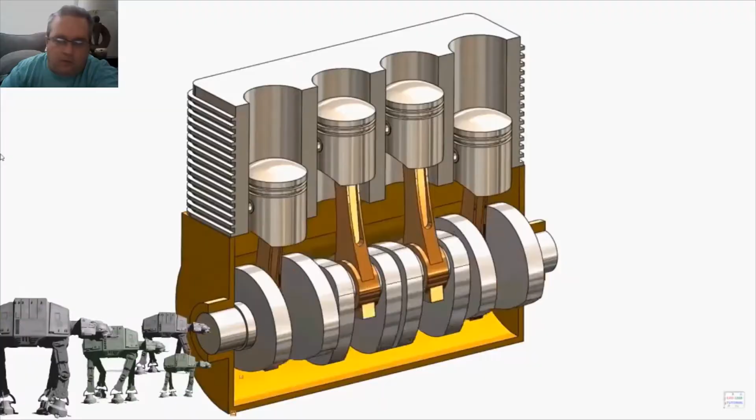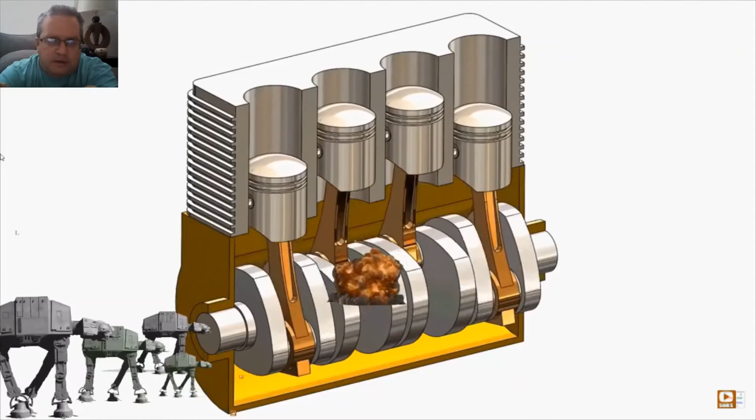Alright guys, we're going to do a 4-cylinder piston engine. This is a fun project. So anyway, we're going to assemble the crankshaft, that is the horizontal bar. You can see there with the crank arms attached. Crank arms are attached to the 4 pistons, and you have the piston housing and then the crankshaft housing on

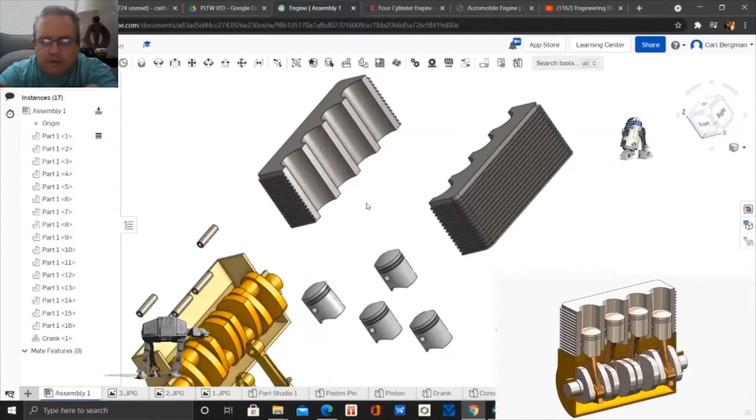the bottom. Alright, so let's go ahead and make sure you have a tab open for the pictures in your Google Classroom, so you can tab back and forth from Onshape to those. Alright, so we're going to go ahead and get started here.

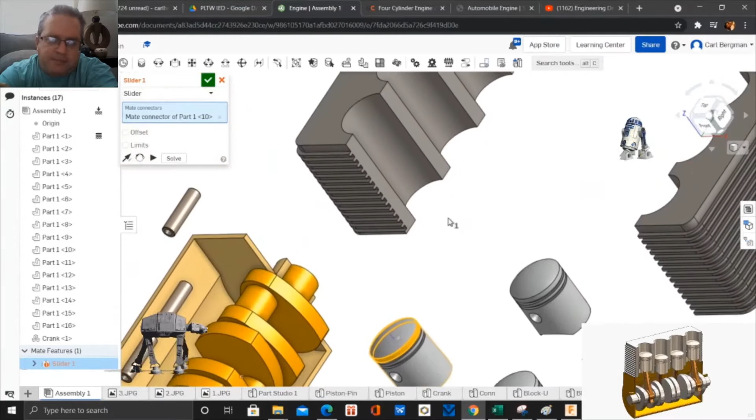The piston block is the gray block, and the crankshaft block is the tan block. So we're going to make sure we assemble all the pistons with a slider, and make sure you hit the top of the piston block, and repeat that 4 times.

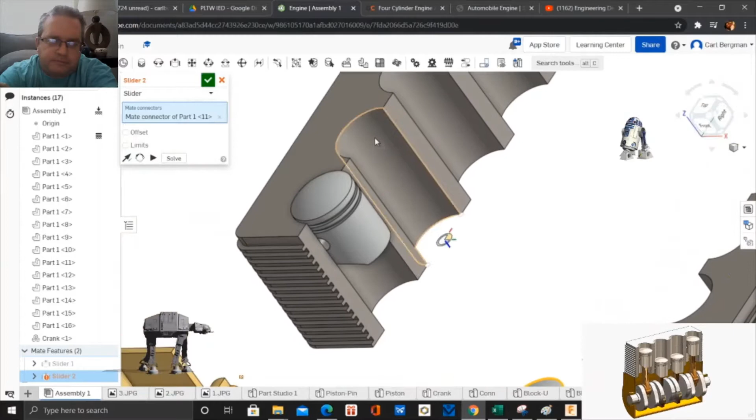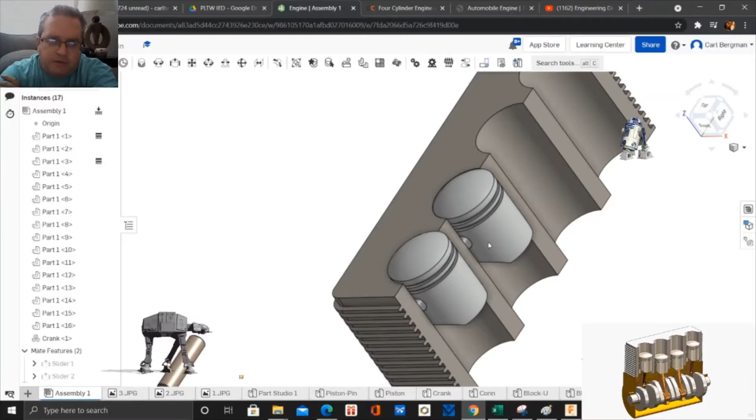If you notice, when I move the piston, the entire block moves, so make sure that you anchor that down. And make sure your pistons, once you move them around, you want to make sure that they're flush. The piston is flush with the top of the piston block.

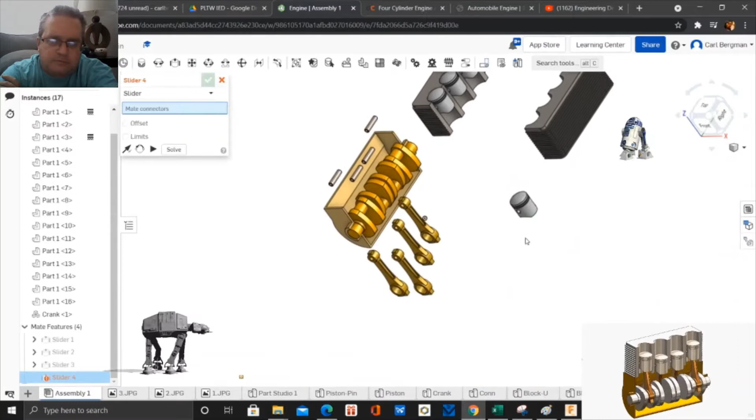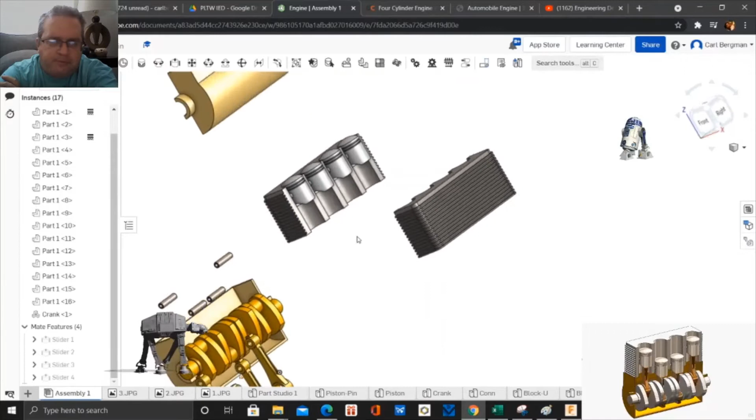So if you notice the bottom right hand corner, I have the simulation. That's what it's going to look like before we put both sides of the crankshaft housing and the piston housing, or the front half of it. So, all right. So the bottom of the pistons, we're going to put in the axles, and those are the gray axles. We're going to put those in.

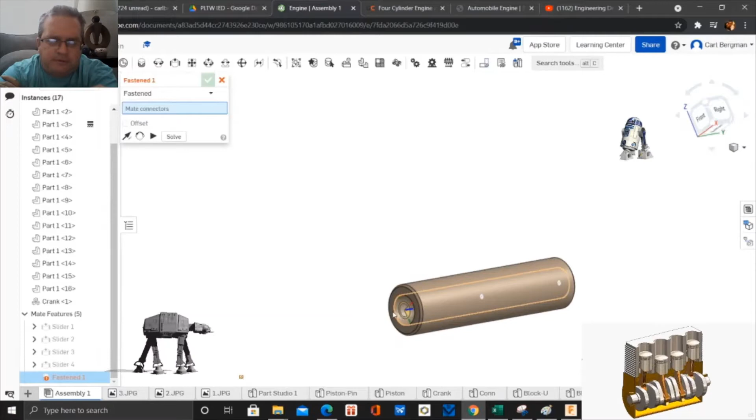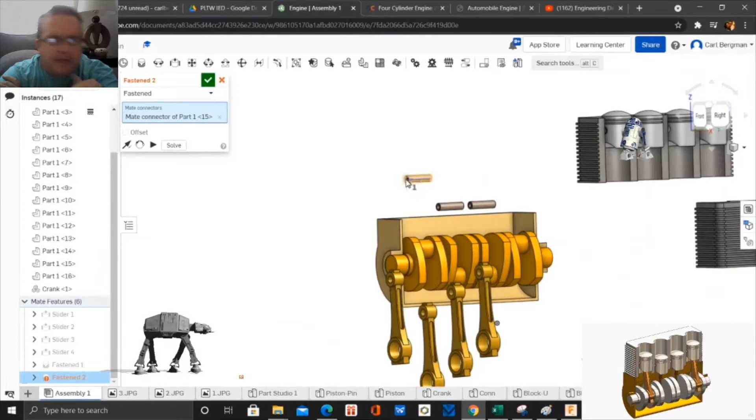You know, there's probably a smarter way to do this. If you were to actually fasten those in and then revolute those, or wait, let me see. You could revolute those and then fasten the crank arms onto there. That would make it easier for you to offset to center your pistons. But we're going to kind of forge ahead and get these on there. We're not going for 100% perfection here.

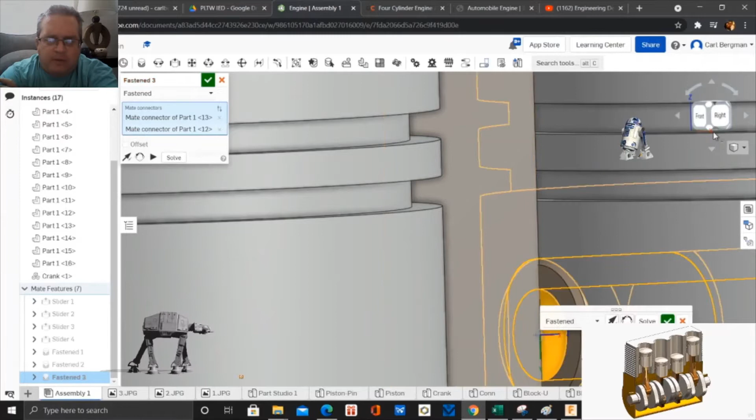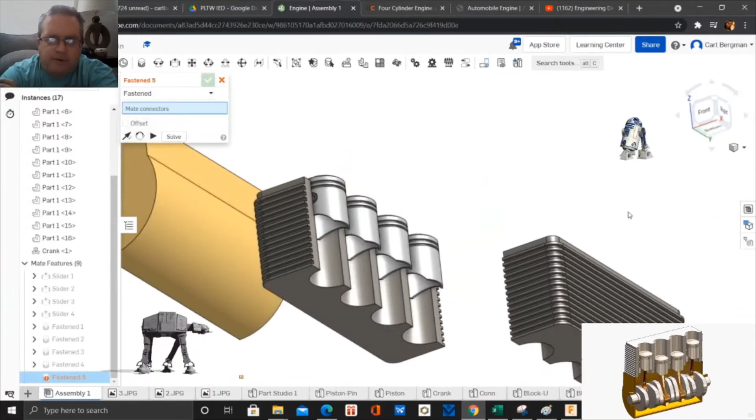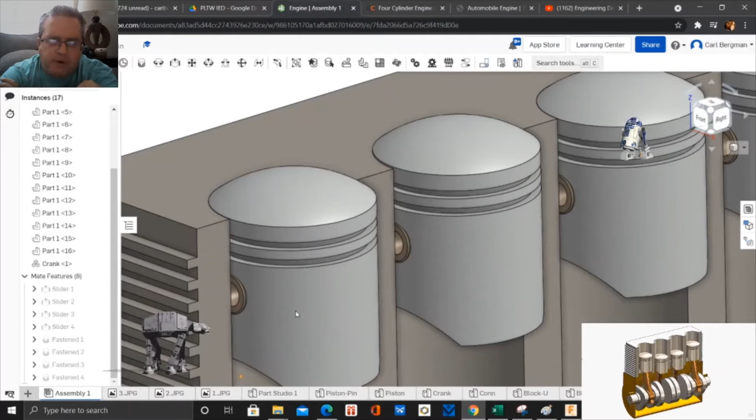The crank arms will be a little bit off center, but they're within the piston itself, so it's not really going to affect the function of the engine. And you'll see what I mean here in a few seconds. So we got the axles inside the pistons. We're going to attach the crank arms to the bottom of the pistons, and we're going to be a little bit off center. You can adjust the offset. Or once again, make sure your pistons are flush with the top. Okay.

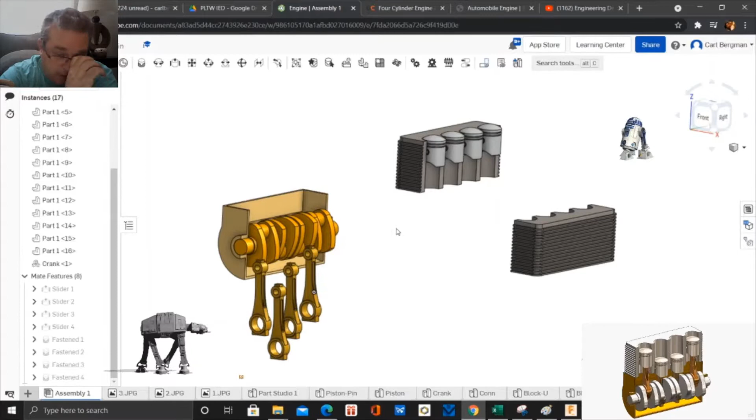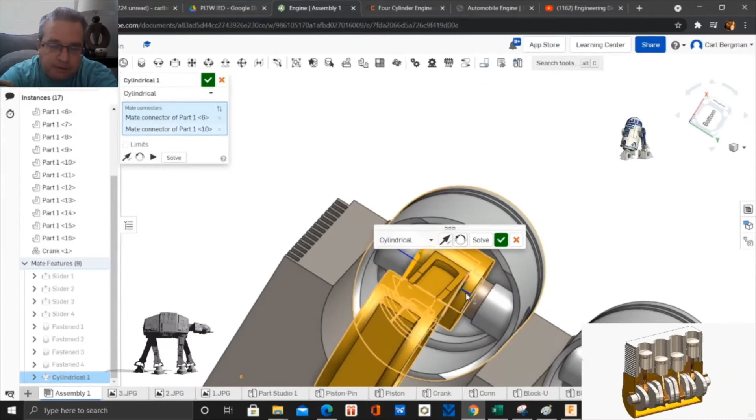So you have your crank arms, and those are going to be attached to the axles that are inside the pistons. And if you want to, this would be your opportunity to do the offset. I'm going to go kind of a different route. I'm going to make these cylindrical.

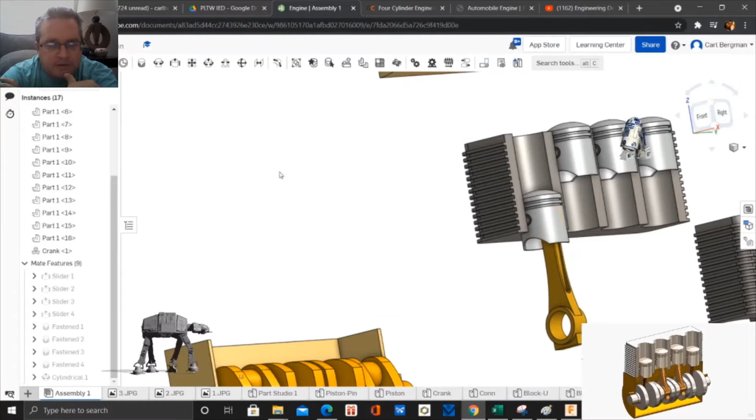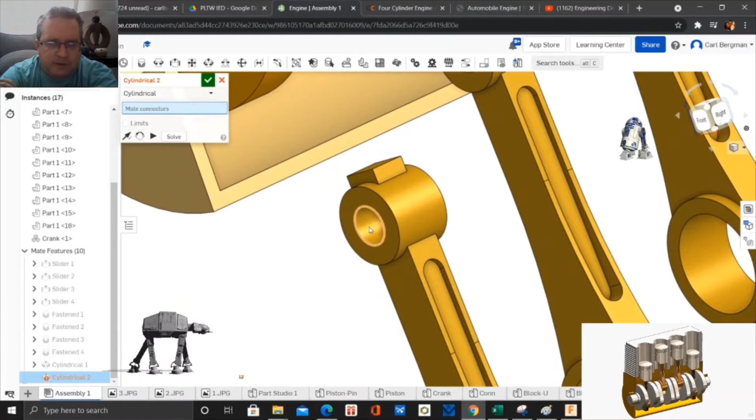You could have put the piston axles on Revolute and then fastened the crank arms to the axle and then offset. So there's many ways to do this, but the way we're doing this right now is fine. They're going to be cylindrical around the axle, and that's fine as well. The reason I use cylindrical over Revolute is sometimes with Onshape, if you use Revolute too many times, they start conflicting with each other, and then you start getting red along the left hand side, and we're trying to avoid that, so that's why I chose cylindrical for this.

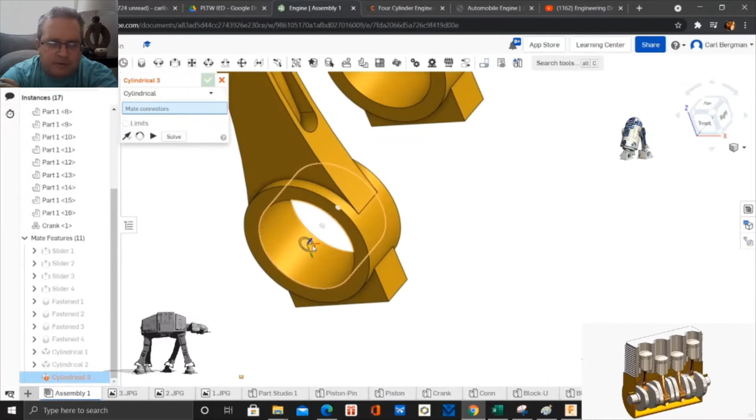So I got everything else on Revolute, so the bottom connections are going to be on Revolute. And here is my first mistake. I chose the wrong side of the crank arm, and so yeah, I do the video and then I narrate my own video, and this is my mistake here, so I have to fix that.

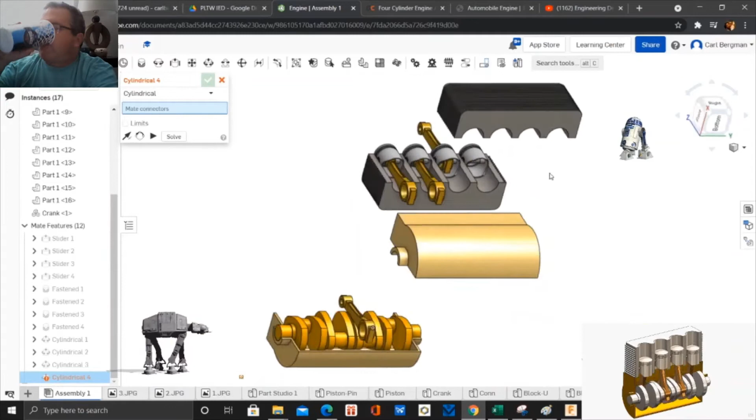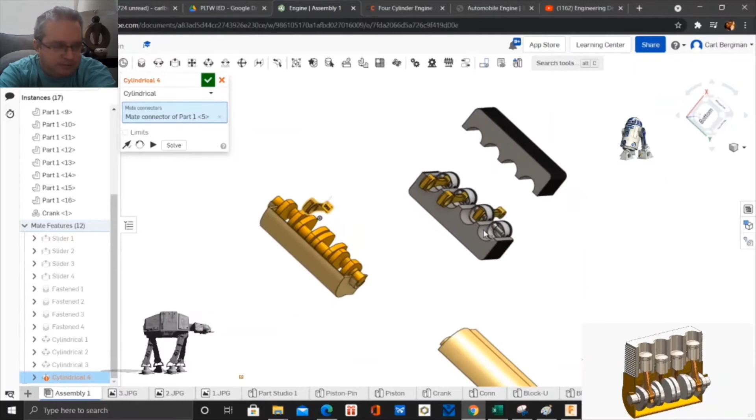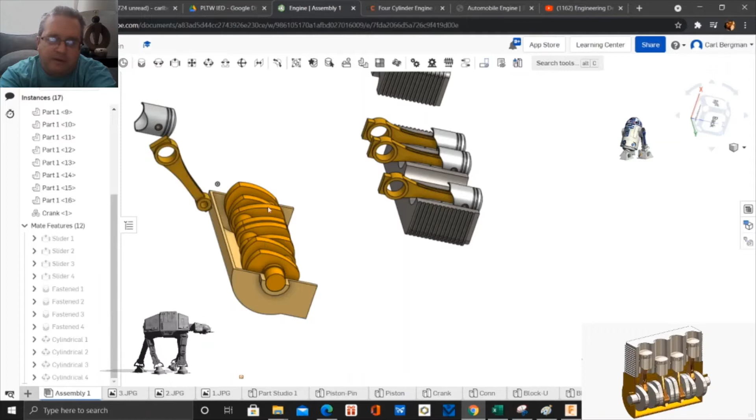So yeah, looking back on the year, I think some of these projects we've done the last 2 weeks, I'm gonna lead out next year with these projects. Even though I enjoy the Lego bricks at the very beginning in August, I think I need to filter out some of the stuff we did. Even though it was fun, I think we can get into funner stuff like this a little bit earlier in the year, and then that'll give us more time for the fun stuff, the math, the mechanical advantage stuff that should have been more part of the school year, I do admit. But we didn't goof off. We did quite a bit of work. I think I can work in more math and make the math fun. That's what I'm trying to say.

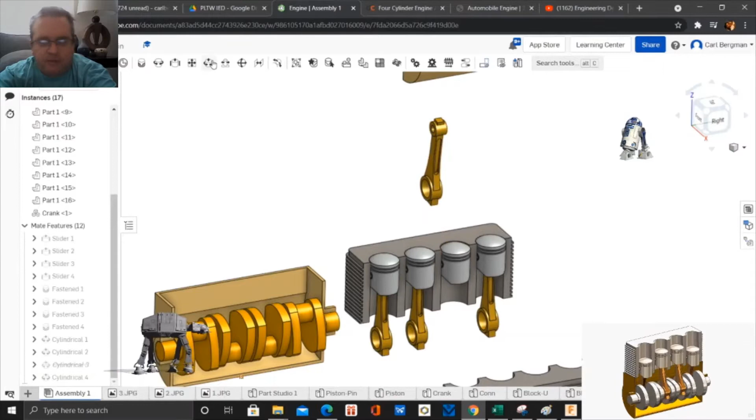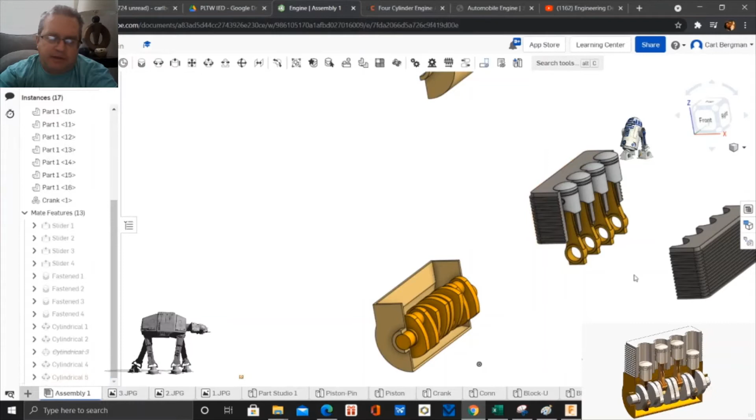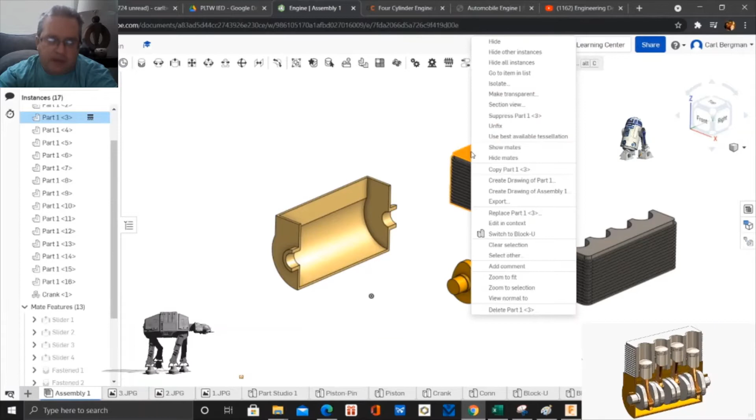Alright, so we're going to connect that last piston with the crank arm. There we go. Alright, we're making progress here. Now the crankshaft, that is the horizontal assembly there. This already comes assembled, and we're going to just position it somewhere below. We don't want to put it up there because we want to connect all of the crank arms with Revolute, of course, to the crankshaft.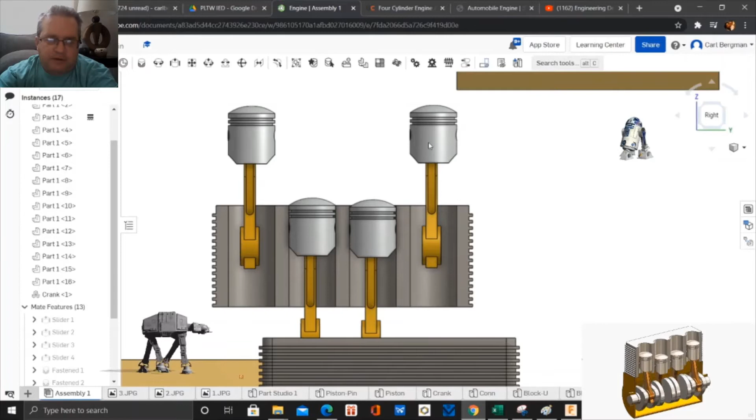And so you'll see the first mistake I make is I forget to anchor down my crankshaft, the horizontal assembly there, and you can see the effects of that. So first of all, get everything out of your way. The piston block there, that's in my way. So make sure your working space is free of clutter. Just move stuff to the side until you need it, and that'll make your day go a lot easier.

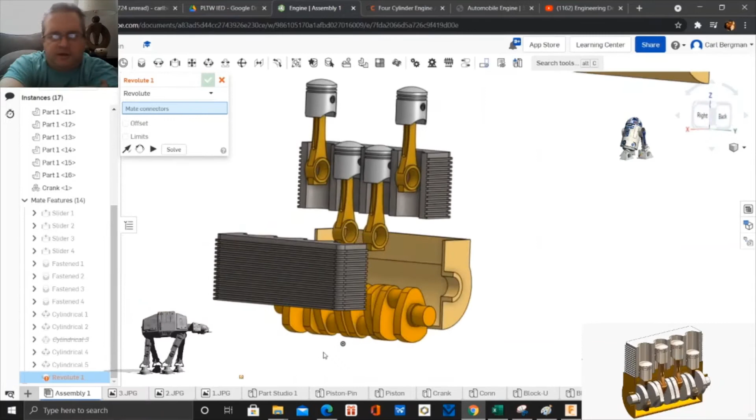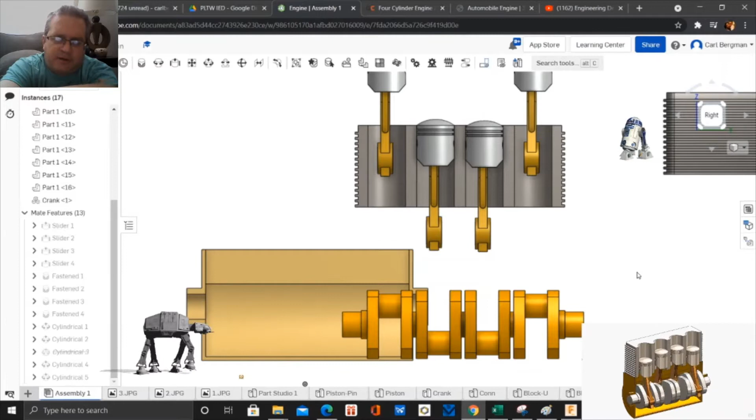Alright, so do the best you can to line it up, and we're going to attach those along the left-hand edge of each of the crankshaft locations. So this would be a good time to anchor down your crankshaft, but I don't do it, and you'll see the devastating effects of what happens when we don't do that. And it goes wild, it goes crazy.

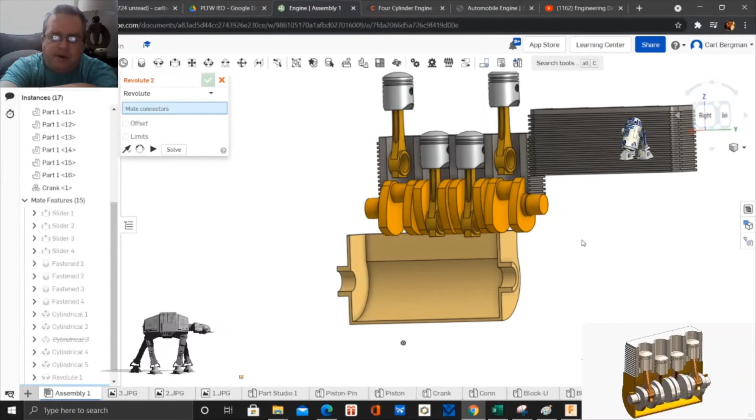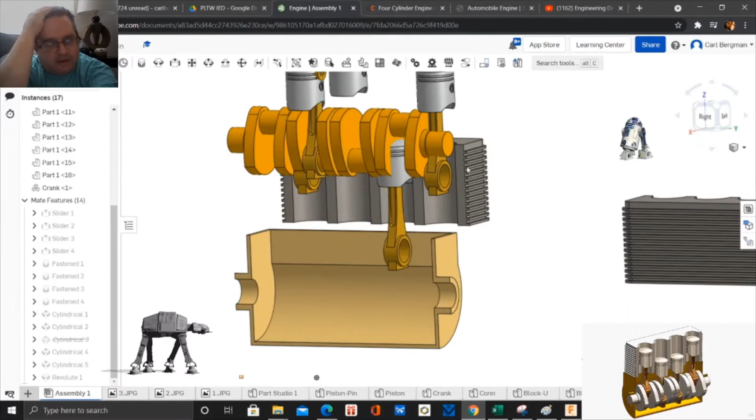So you can pull that down because you've got one piston attached. You can pull that down, but now you're going all over the place. So best advice is just to click on undo, put it back where you had it, and anchor it down this time.

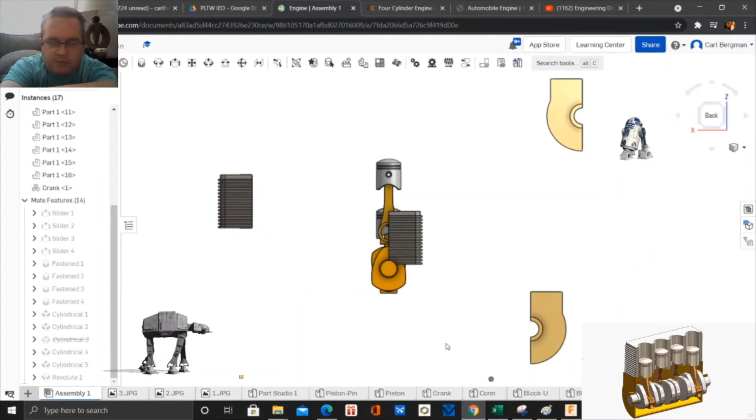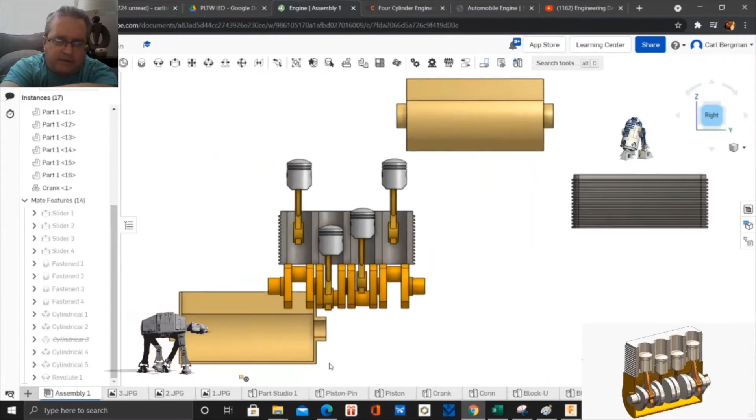Alright, so that looks good. And so we're going to anchor this thing down. At this point, it doesn't really matter too much if you have it aligned vertically with the piston block, because once you attach the bottom half of this thing to the tan crankshaft block, then it'll line everything up vertically and horizontally. Alright, so we're going to anchor this thing down first.

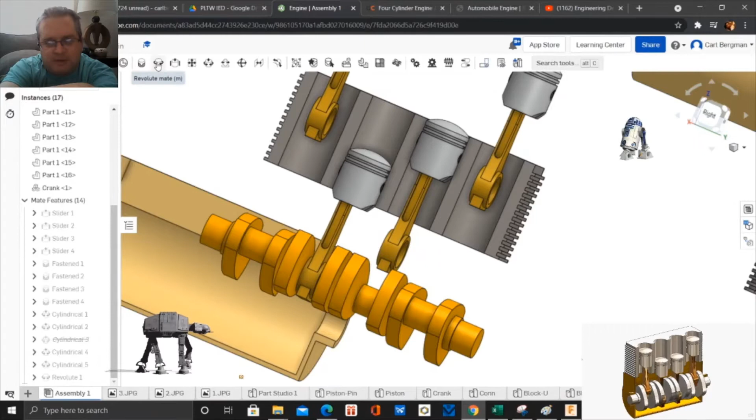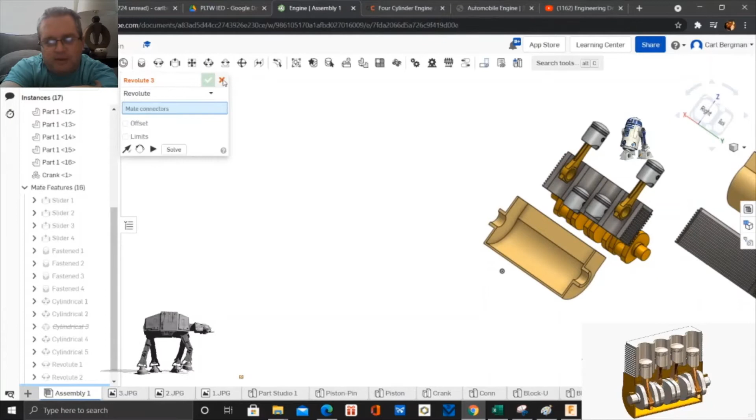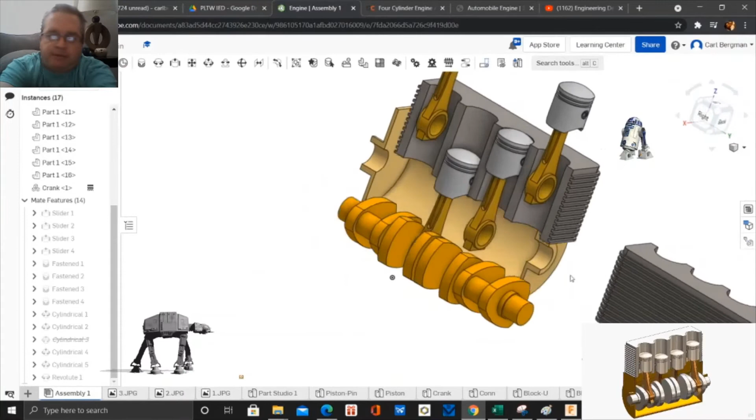I'm not sure if I remember at this point. I think I repeat my same mistake. Yes, I'm going to make the same mistake. I forgot to anchor it down, so it's going to do some weird stuff again. I thought I learned from my first mistake. And it goes flying off into left field there. So let's undo. Anchor it. Fix it. Bolt it down. Alright, revolute.

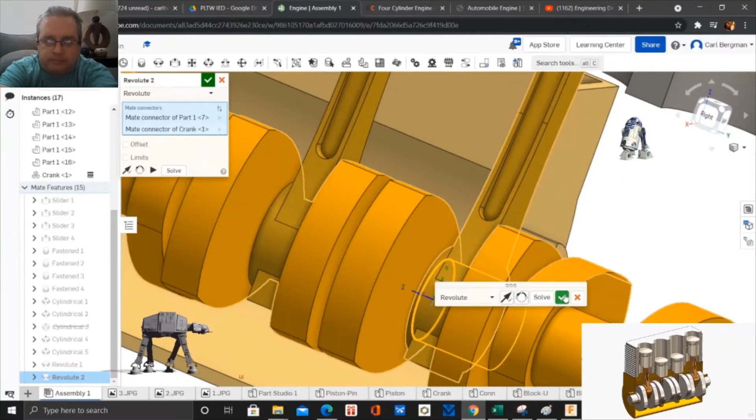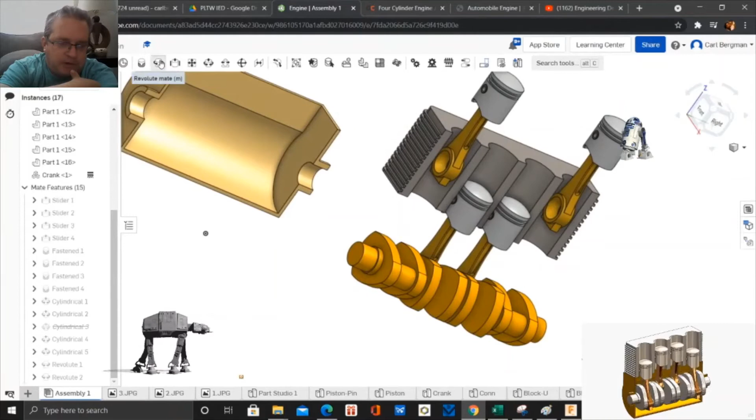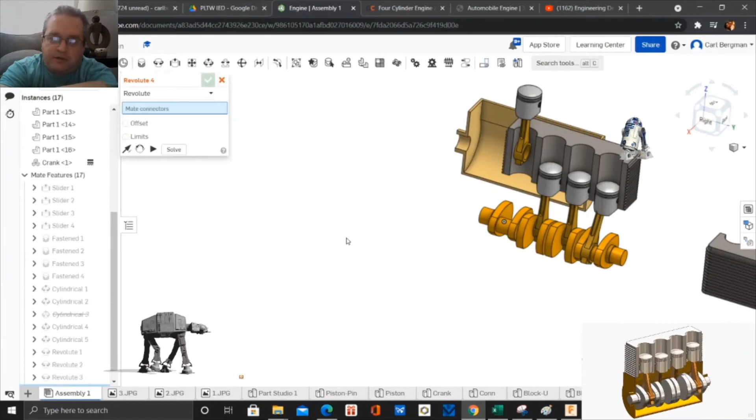So I think it would be nice to import this into the truck that everyone's working on from last week. Maybe actually put this engine into that truck, so you'll have an actual working engine. Then maybe figure out a way to have this engine drive the wheels. That would be really cool. Hook some gears up, transmission. Transmission with a rack and pinion. Yeah, that's an idea. Alright, so anyway.

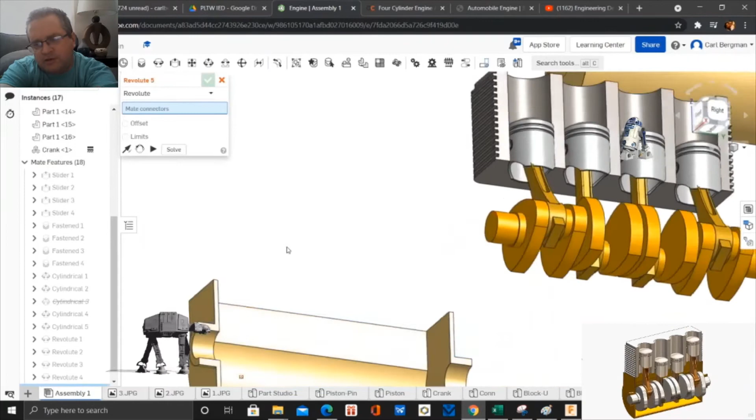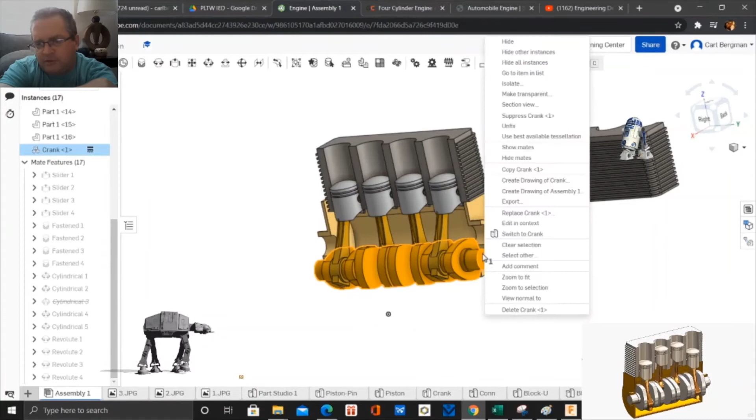So you can see that your pistons are staying along the path of your first action, which was the slider connection. So it's doing what it's supposed to, and the arms are adjusting laterally and vertically to make sure that it's staying on the crankshaft, as well as the piston staying within the constraints of the path of the piston block.

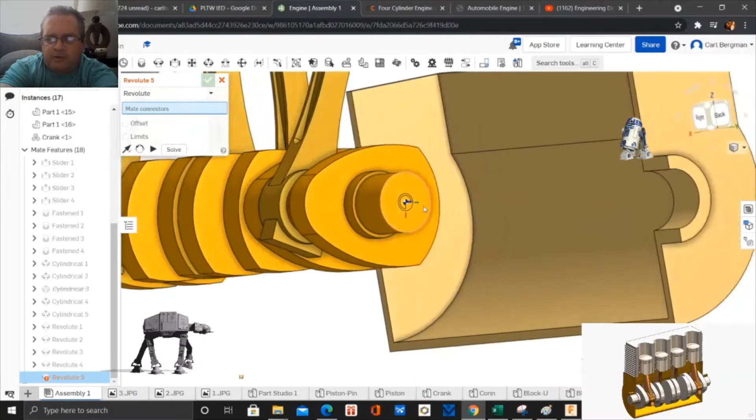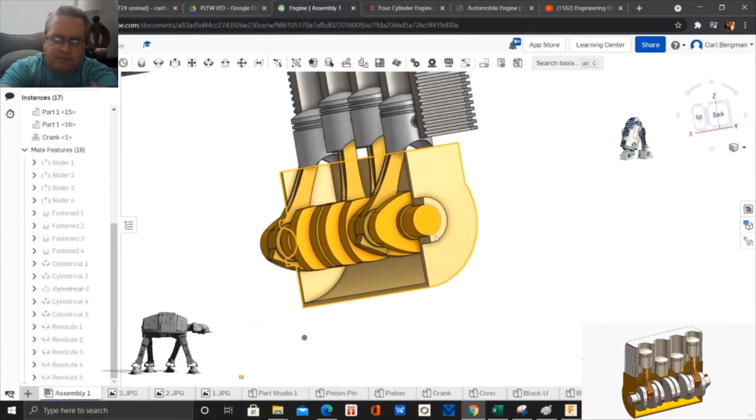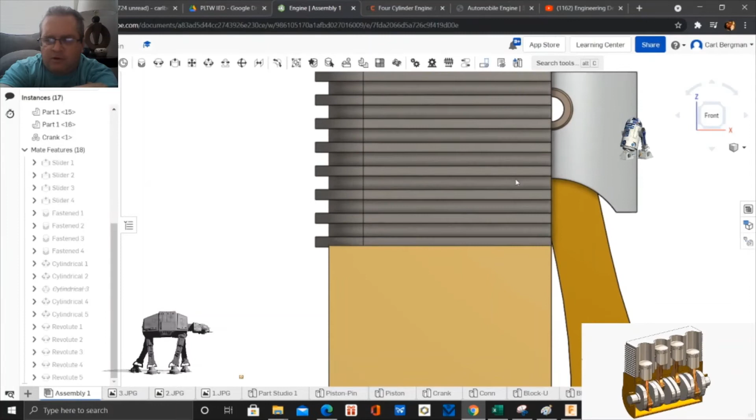Alright, so what we're going to do is place that center onto the crankshaft block, and press solve. It'll drag all that stuff over there, and we're almost done. So what I'm going to do is manually adjust the top of that engine block, both vertically and horizontally. I'm going to line it up. Of course, there's a more scientific way. You can grab the corners and fasten them, I just decided to move it myself, and I think I have it lined up left and right as well.

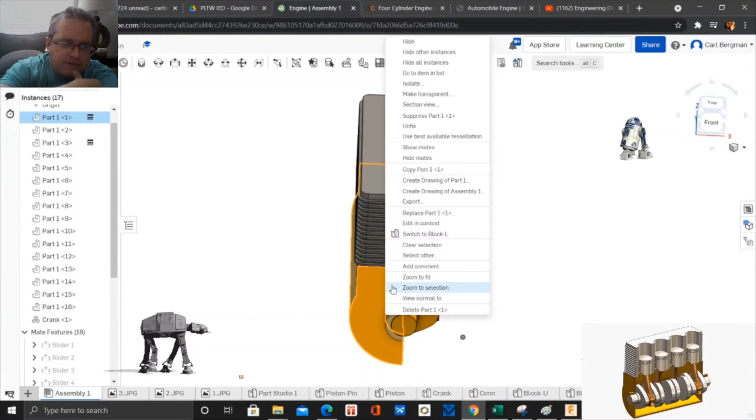Okay. Alright, so you can fix that in position, and that works the same as fastening the top and bottom together. As you saw, I just fixed the top, and so nothing's going to move except for the pistons and all that stuff.

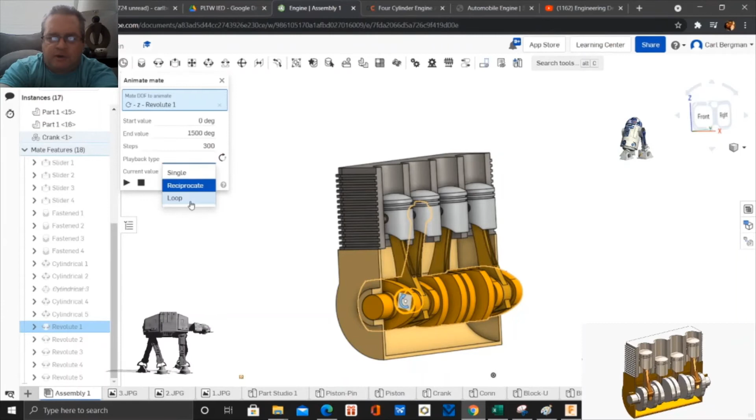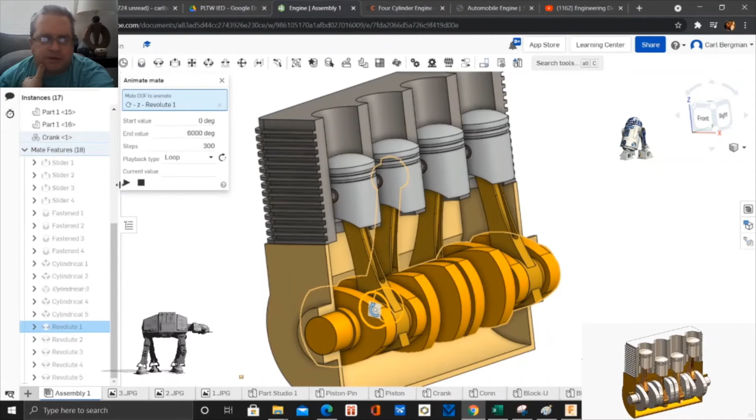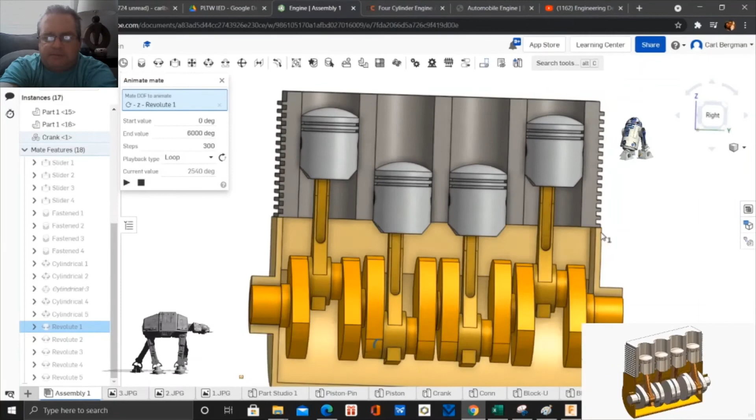Alright, so we're going to simulate and see, is everything lined up the way it's supposed to be, and the crankshaft is operating like a normal crankshaft. Crank arms are going vertically and laterally the way they should be. And so all I did is I right-clicked on one of the revolutes and I just animated. And then the end value, you put in 5, 10, 1500. And then put in the loop and press play. For some odd reason, you got to press play twice. Let's see, here we go.

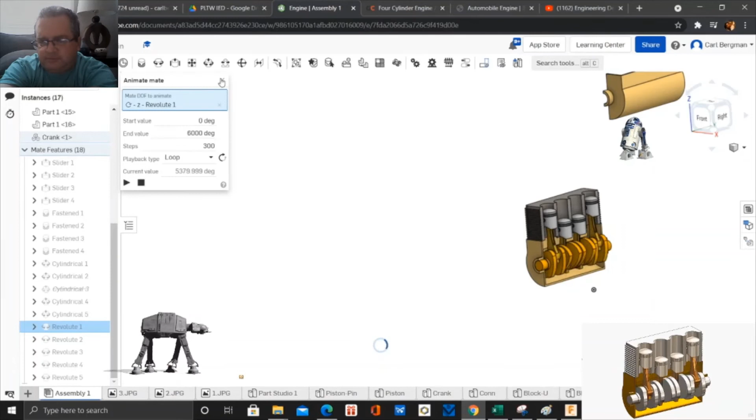So we're going to put the top on, the bottom on, and we're going to turn on the translucent and translucent with edges, and you can see the outline profile of the engine as well as the inner parts function as well. All right.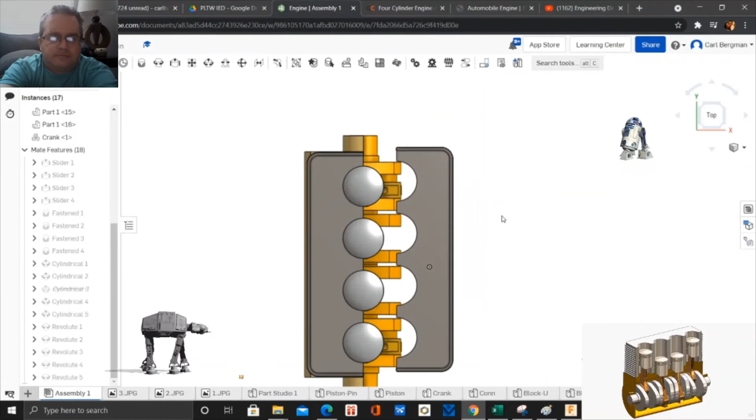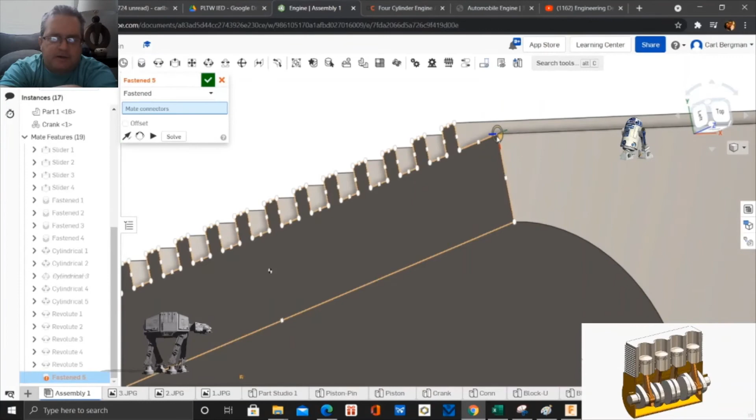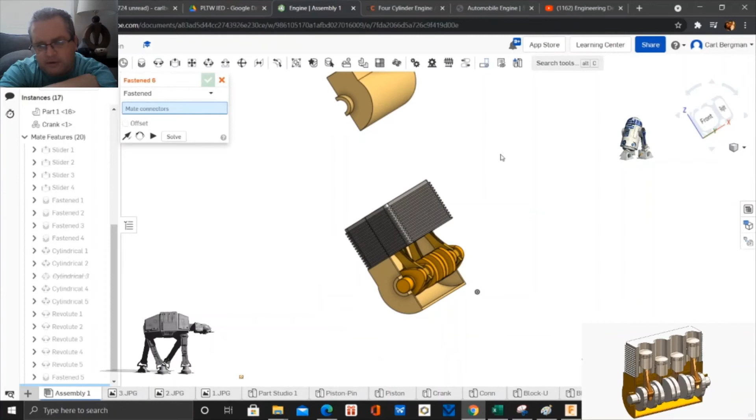So first I pulled over there to see if it does visually connect, and this one I'm going to be more scientific on my attachments and actually click on the fasten tool and connect the edge. So then when we get the crankshaft block, want that on there too.

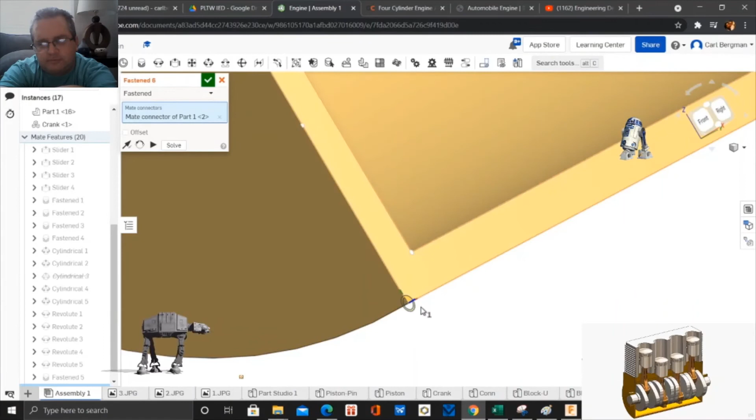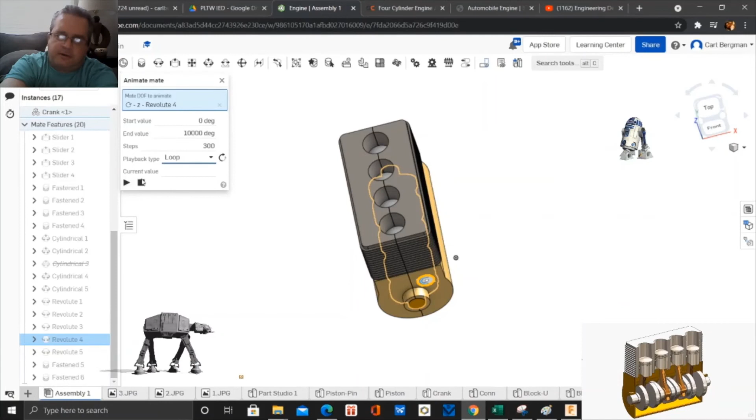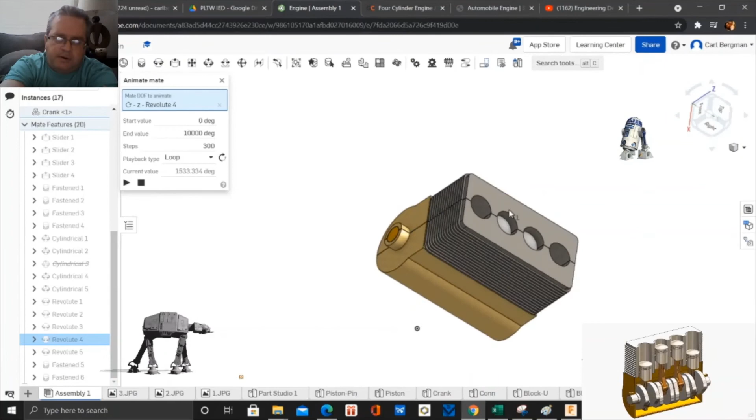Alright, so if you want to animate this thing, while you have the animation going, you can click on the different views over there on the upper right-hand side, the little shadow box. You can pick translucent or translucent with edges, and while that animation is playing, you can actually look at kind of an X-ray vision view of the engine, see how everything's working. So you got translucent and then translucent with edges.

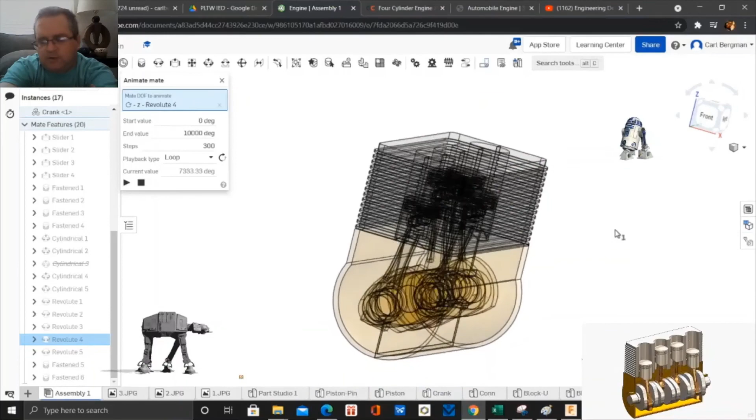So if you pick translucent, you can see through it, and you can see how the pistons and the crankshafts and crank arm and all that stuff are working together.

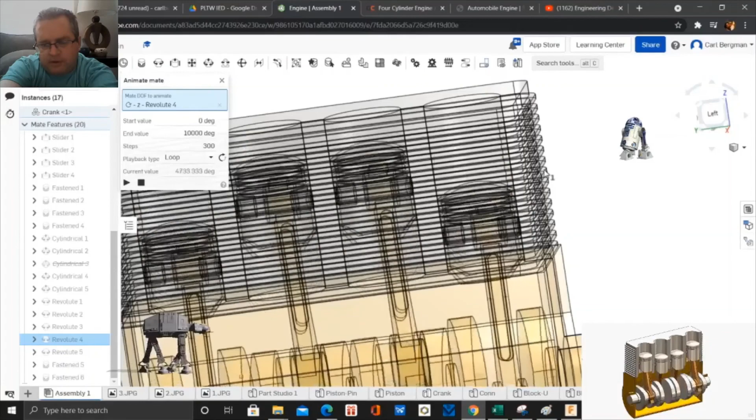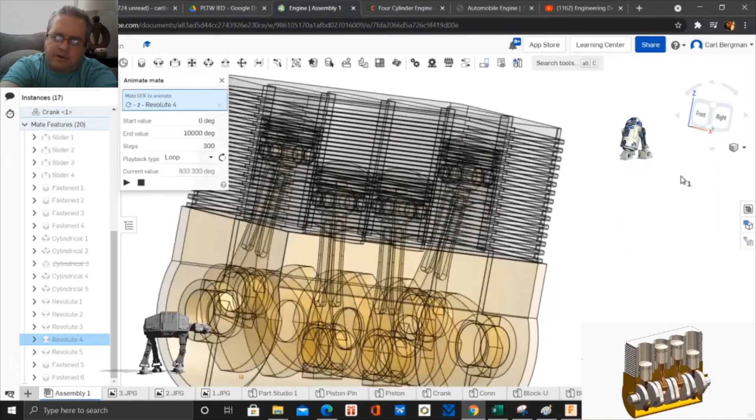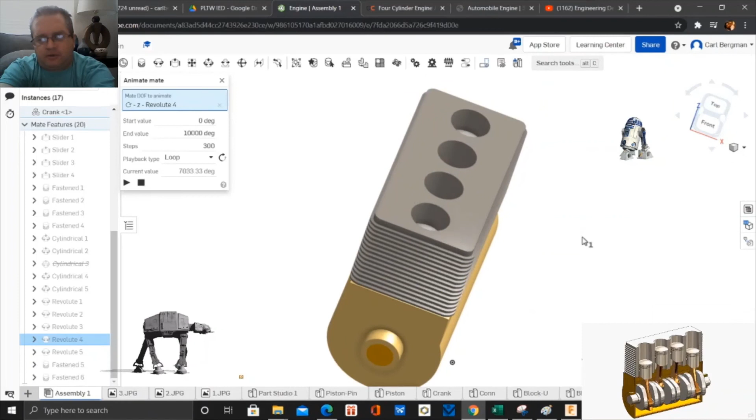Alright, so we are going to look at mechanical advantage. We'll look at ideal mechanical advantage, which is the measurement of your distance effort and distance resistance. Your distance effort is going to be the pistons themselves with the crank arms, and your distance resistance is going to be your crankshaft diameters and the different positions of the crankshafts according to how they are synchronized with the pistons. So we're going to look at ideal mechanical advantage. Not going to look at actual mechanical advantage because we don't actually have a measurement of the actual force.